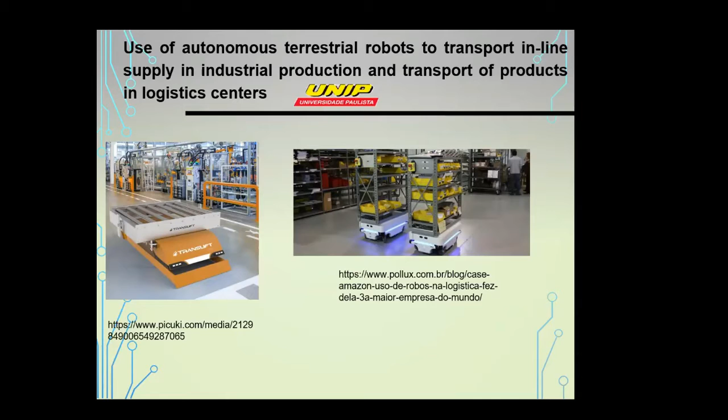Historically, since Aristotelian thought, logic has contributed to correct thinking, and in the world, observations are not limited to false and true states, and often seek to relate reasoning to knowledge. Over time, logic was divided into classical and non-classical, and within the latter, paraconsistent logic occupied a prominent place because it deals with the principle of contradiction, in addition to the basic principles of Aristotle's classical logic.

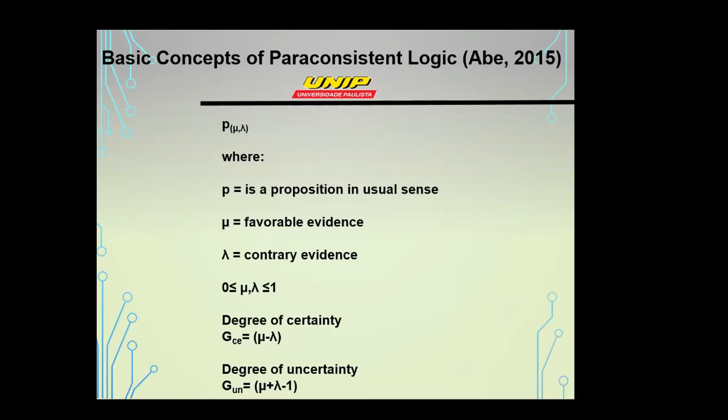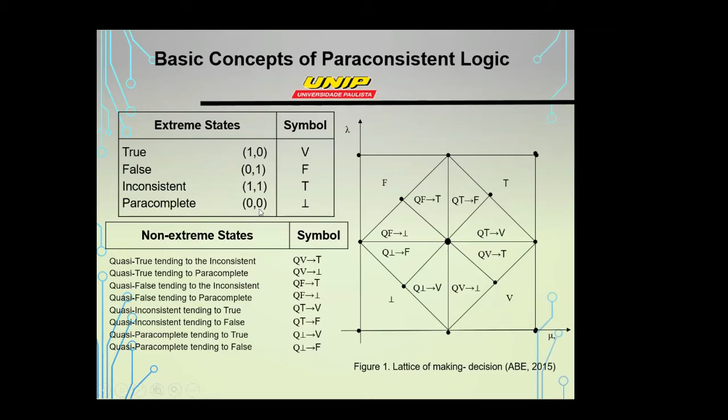One of the challenges of contemporary robotics is to develop an efficient and safe navigation system applied to autonomous robots. In Brazil, historically, the Paraconsistent Logic Annotated Evidential Eτ has been applied since 1999 as a decision-making tool in a navigation system of autonomous robotics.

Highlight the Emmy I prototype, which was a mobile tower with a circular aluminum base equipped with ultrasonic sensors with the technology of the time, located in front of the robot to detect possible obstacles.

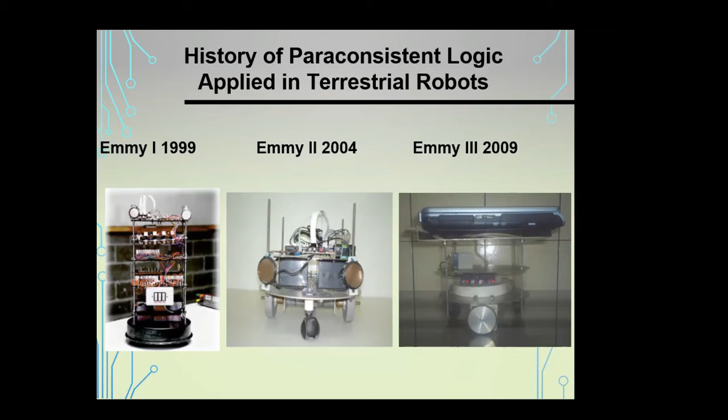A more advanced version emerged in 2009 with the Emmy III prototype, whose author's main idea was to improve version 2 to expand the navigation capabilities through a task based on an origin and a destination. This project was conceived based on the predecessor in order to contribute to research in the field of robotics of autonomous navigation systems.

According to Miatluk, the mechatronic system design process contains several phases: plan for development of specifications, project concepts, project details, construction, service, and retirement.

Another difference is the use of an LCD to monitor the readings of all sensors, as well as to observe the value of the angle pointed out by the servo motor. All these observations will be extremely important in small-scale industrial plant trials.

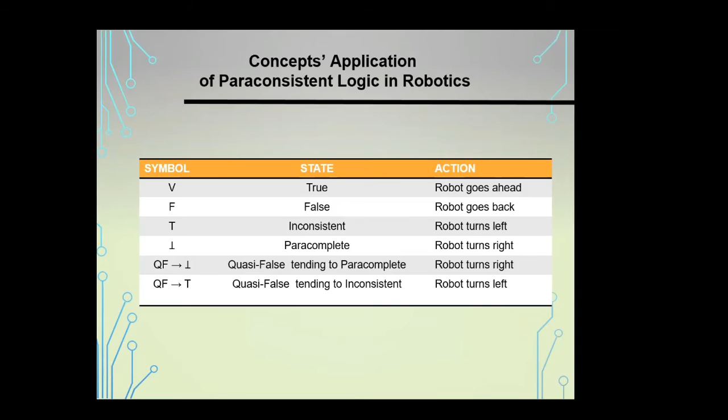Based on the knowledge of paraconsistent logic and the mechatronic project already in phase 3, a simulation was performed with 20 different situations, including static obstacles in front of the robot.

Next, a normalization of the readings of frontal sensors for mu and lambda reticulate was made. This normalization process consists of adapting the values obtained for the distance in centimeters and converting them into a range between 0 and 1, a concept used in paraconsistent logic.

Based on the proposition that the front of the robot is free, and applying the properties of the reticulate and logic concepts, the degree of certainty and uncertainty for each of the situations were calculated.

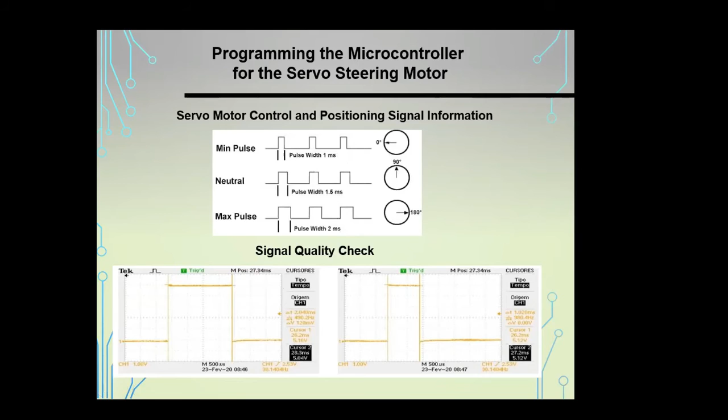This image illustrates the implementation being checked on the oscilloscope for practical operation testing.

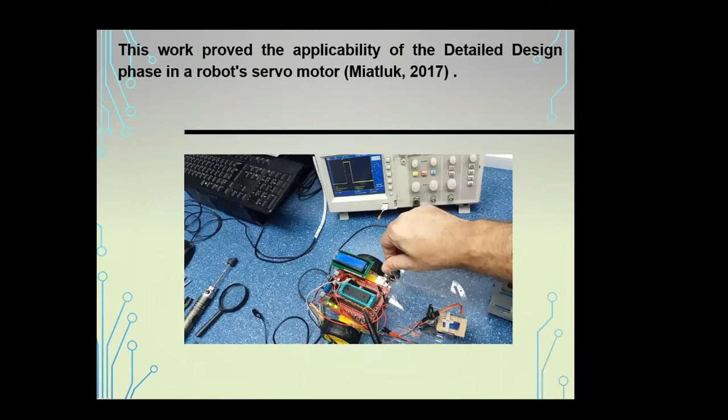The Arduino platform, widely disseminated in the world, was used to conduct the tests.

The LCD in the simulator shows the value read by the right frontal sensor, and the same line also shows the uncertainty degree. This value is shown in the first line. The second line shows the value of the left sensor and the degree pointed out by the servo motor.

A 0 degree of uncertainty is observed with the servo motor pointing to the middle.

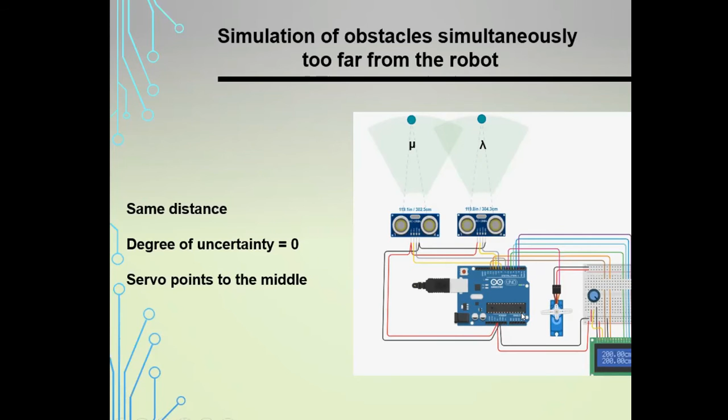With an imminent obstacle on the left side, the servo motor indicates an approximate value of minus 47, with an uncertainty degree of minus 0.5.

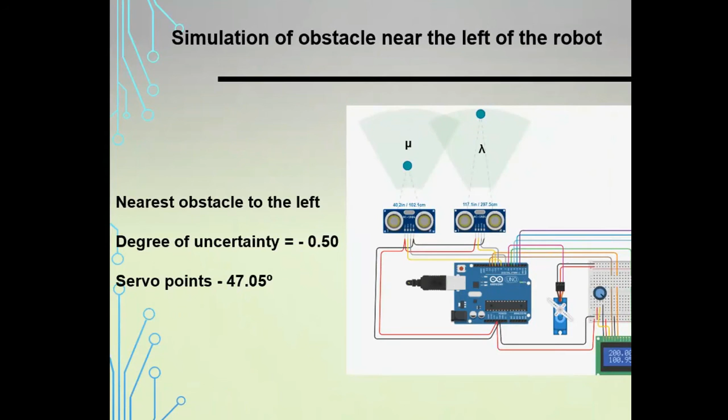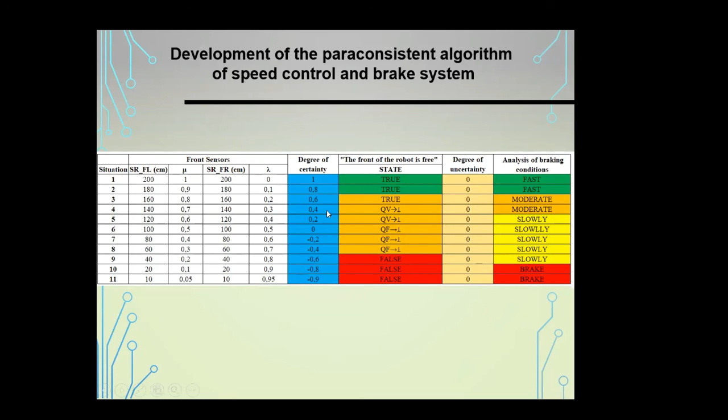This work showed the applicability of algorithms developed based on Paraconsistent Annotated Evidential Logic Eτ, with a detailed design phase for the servo motor of the robot, contributing to its efficiency and assisting the decision-making process. In addition, the application of paraconsistent logic keeps the servo motor running within the manufacturer's specifications, which contributes to a longer life cycle.